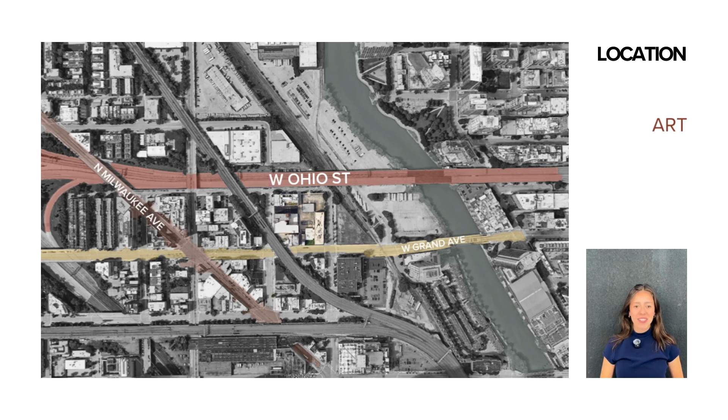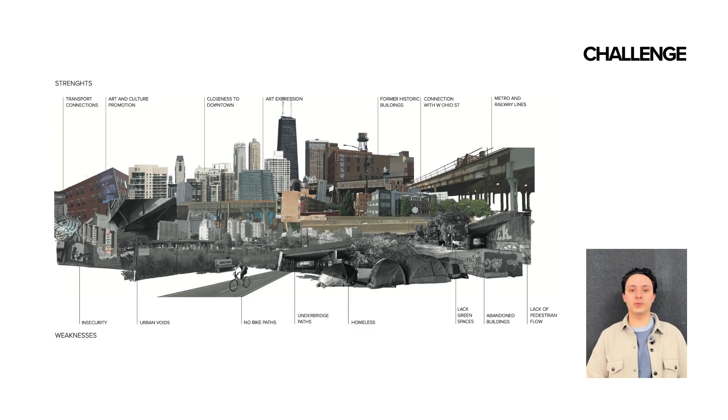Our project is conceived as a hybrid ecosystem where art, culture, and well-being come together in the Fulton district, responding to disconnection and lack of social infrastructure with a new model of urban living that heals, inspires, and reconnects people with nature and community. A challenge at the site was the lack of vibrant public life and the perception of insecurity, primarily due to the scarcity of accessible public green spaces and the presence of urban voids and abandoned buildings.

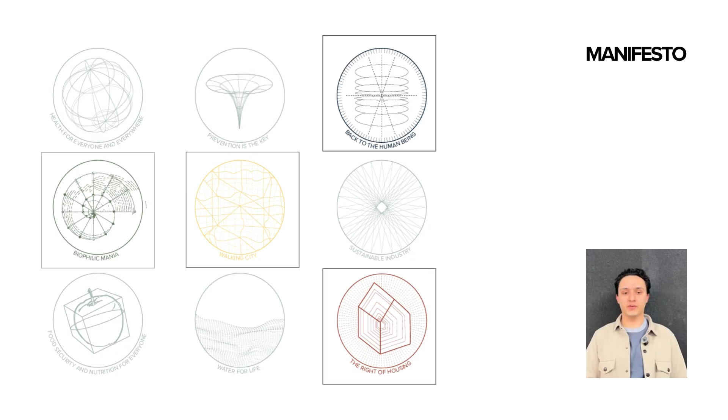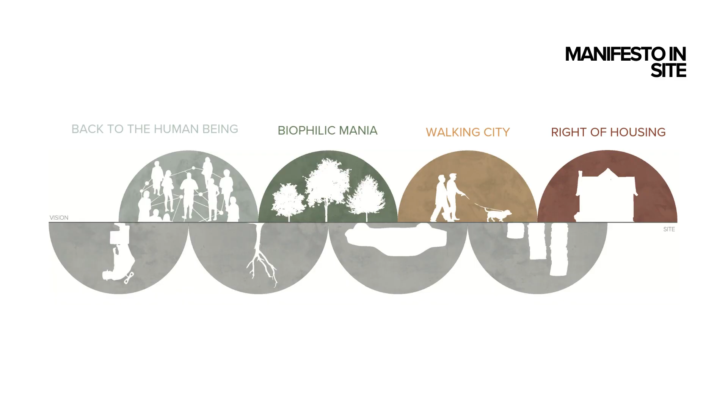Our design strategy directly addresses this through 4 core pillars of our collective manifesto: back to the human being, biophilic mania, walking city, the right of housing. These holistic frameworks fundamentally question how architecture can become the most powerful tool for well-being. The intervention begins with a commitment to preservation and adaptive reuse.

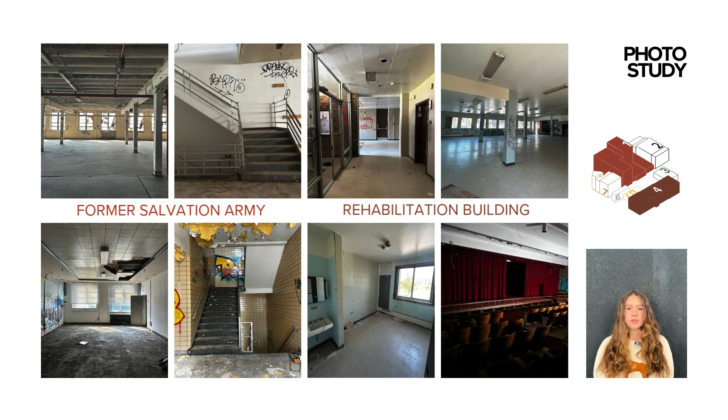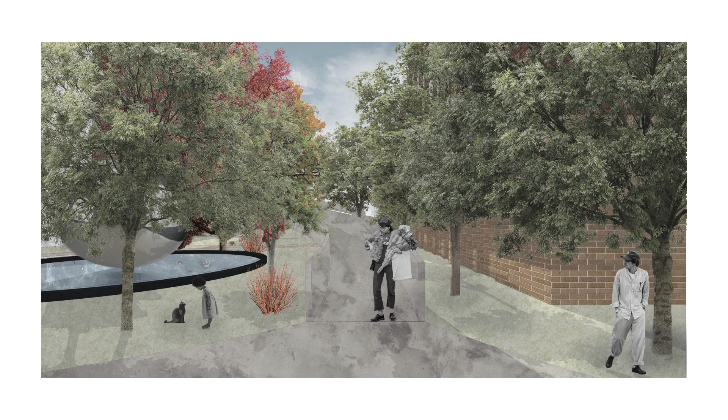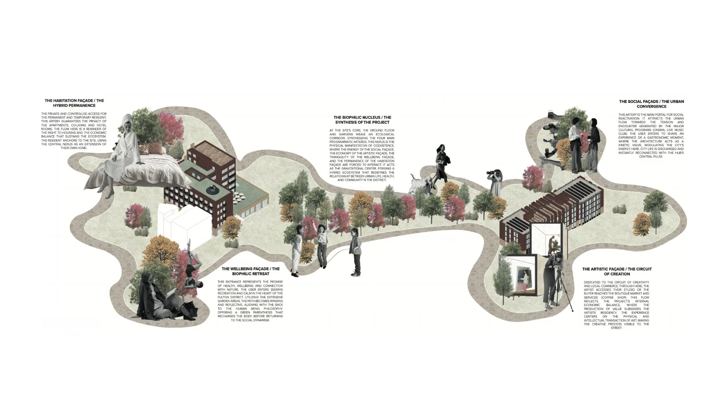This green nucleus immediately responds to human and environmental needs, providing accessible public space and biophilic elements. This strategy successfully establishes a powerful hybrid ecosystem where housing, hospitality, and public space coexist, transforming the site into a definitive hub of art, culture, and community.

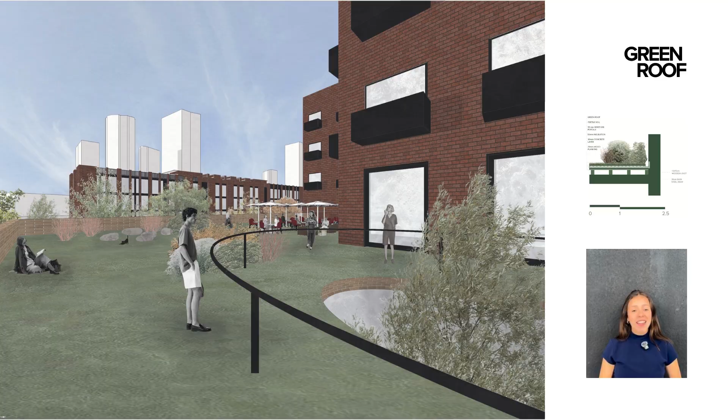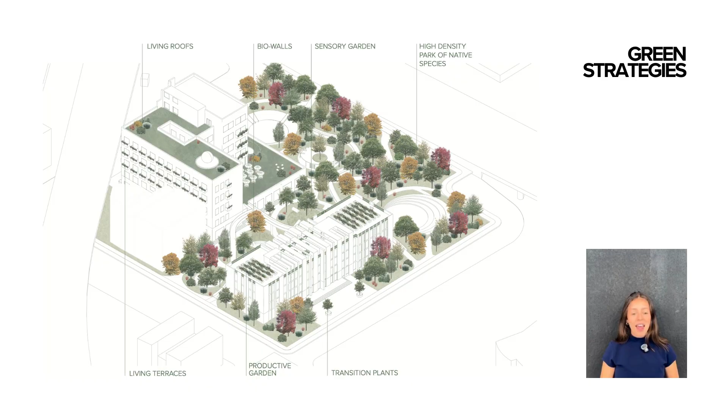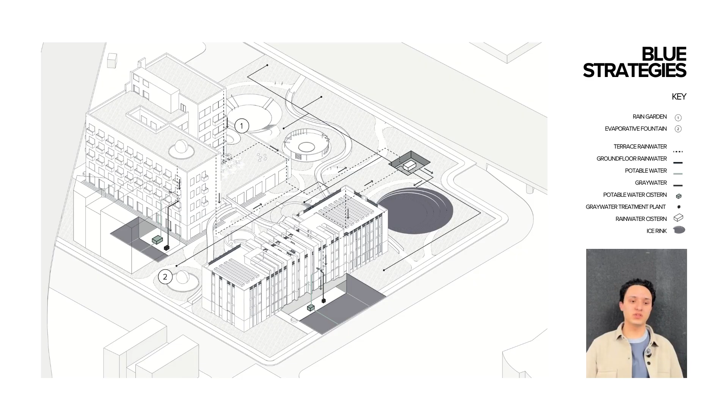Our blue strategies established a resilient and closed-loop water management system. We employ a sunken rain garden in the restaurant zone and incorporate evaporative fountains to passively cool the environment during hot months. Crucially, we implement rainwater harvesting across the rooftops to collect and store water for the irrigation of all park areas and the supply of the seasonal ice skating rink. Finally, a dedicated system for grey water treatment ensures that all water from the building is recycled and reused, significantly minimizing our demand on municipal resources and reinforcing the hub's commitment to water sustainability.

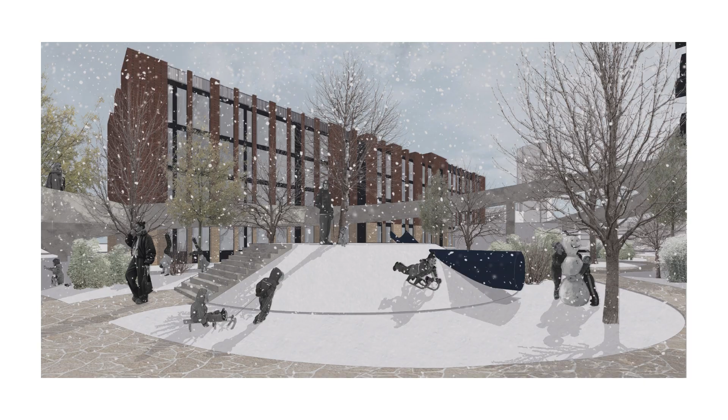The creation of this central green nucleus is a direct response to a critical urban need, addressing the increasing trend toward privatized spaces and amenity access conditioned by socioeconomic class. To counteract this, the design is anchored in seasonal adaptation, ensuring that the park remains vibrant, safe, and truly democratic year-round, resisting the obsolescence that plagues single-use areas during Chicago's extreme climate shifts.

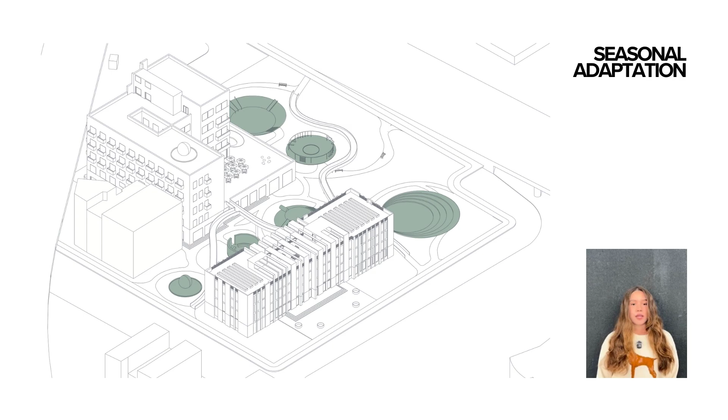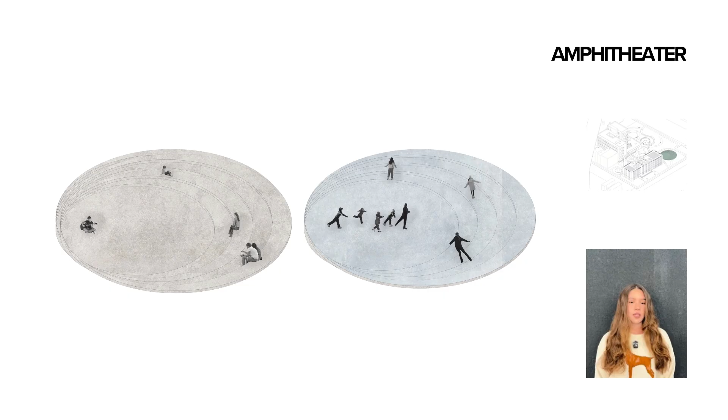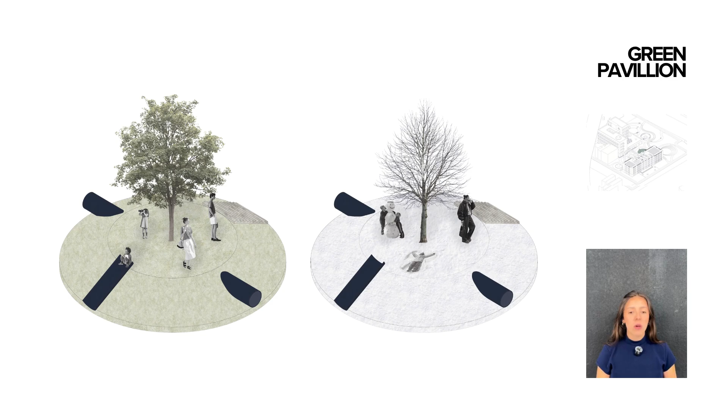We incorporated several interactive circular modules, each defined by a duality that maximizes utility. These spaces include the sculptural fountain, which welcomes visitors year-round and becomes an iconic winter sculpture; the amphitheater, which transforms from stepped seating and a forum into a seasonal ice skating rink in the colder months; the Green Pavilion, which adapts by incorporating a central fire pit to create a protected microclimate, ensuring it remains a vital gathering spot during extreme cold; the Sensory Garden, with a higher vantage point and a unique experience, whose slopes adapt for winter sledding; and the children's play areas with monkey bars and other play structures that also adapt for winter play.

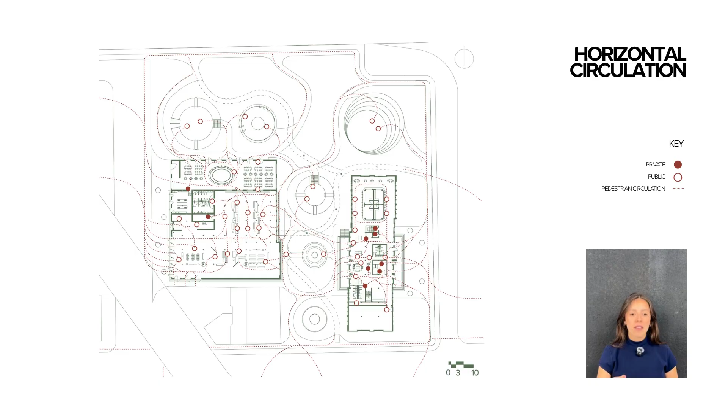In terms of circulation, the park incorporates ground-level pedestrian paths and a perimeter running and cycling track that reinforces our walking city commitment. Finally, a pedestrian ramp is integrated, creating an elevated walkway that reconnects the ground floor to the building's level 1, enhancing permeability and offering a higher perspective of the entire hub.

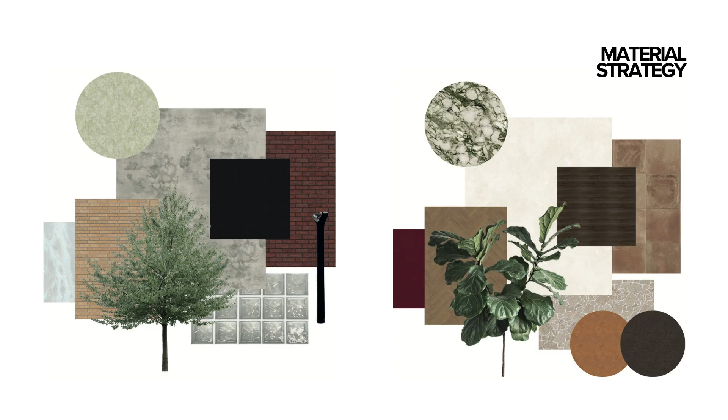The material strategy preserves the site's original industrial elements, which are complemented by new materials of the same character. However, to ensure visual cohesion, key alterations were necessary, most notably the significant facade redesign of the Atlr residential building.

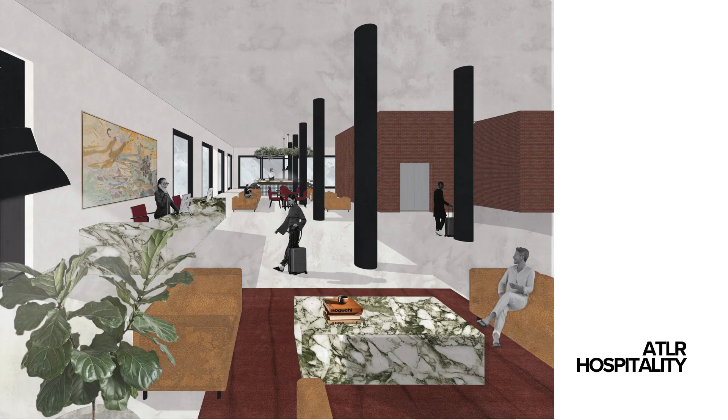The transformation of the former Salvation Army building into Atlr Hospitality is centered on preserving its status as a recognized community anchor to become the main destination of the project. The interior retains the main structural grid. New elevators were added and internal walls were strategically incorporated to maximize programmatic flexibility and introduce new hotel programs. The intervention of the iconic facade remains minimal, preserving its character while incorporating subtle green balconies.

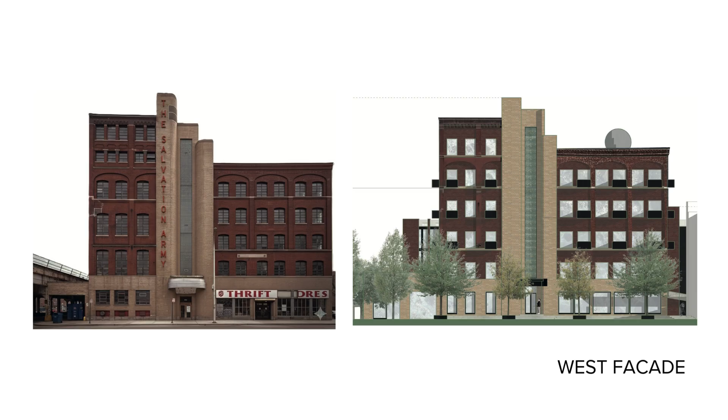Public amenities include a restaurant with a direct connection to the park, a cafe, a top-level bar, and a rooftop garden that offers the best views of the Chicago skyline. Finally, a gym, a spa, and a co-work zone exclusive to the hotel guests.

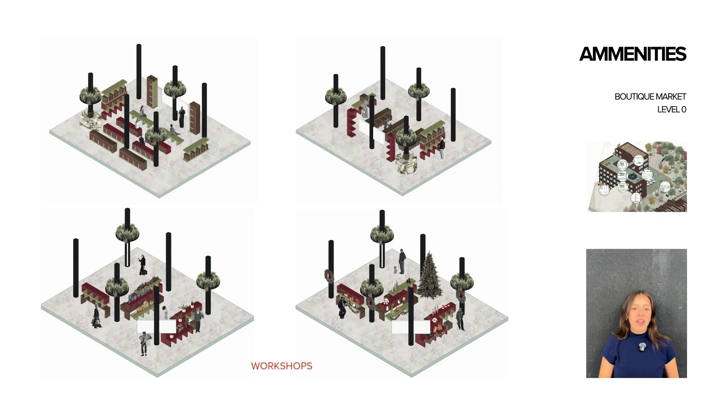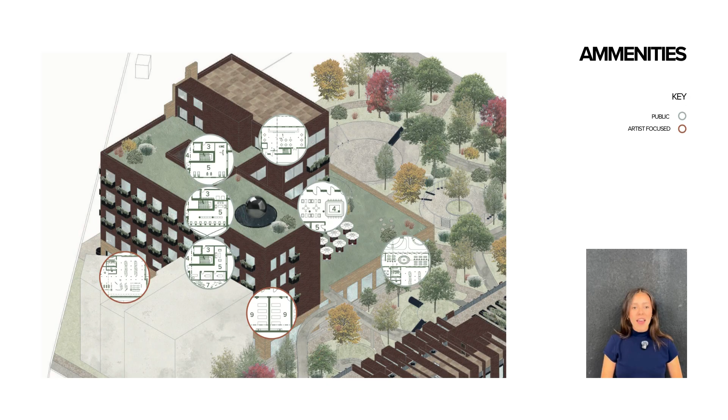The artist-focused amenities include a flexible boutique market created with multi-purpose furniture that offers the possibility to create workshops that host artistic activities. Conferences are divided by rotating whiteboards that serve as both adaptable partitions and vertical displays, as well as long-stay artists' private studios. This layered approach ensures that the building functions as a social nexus, balancing tourism and hospitality with community engagement and creative commerce.

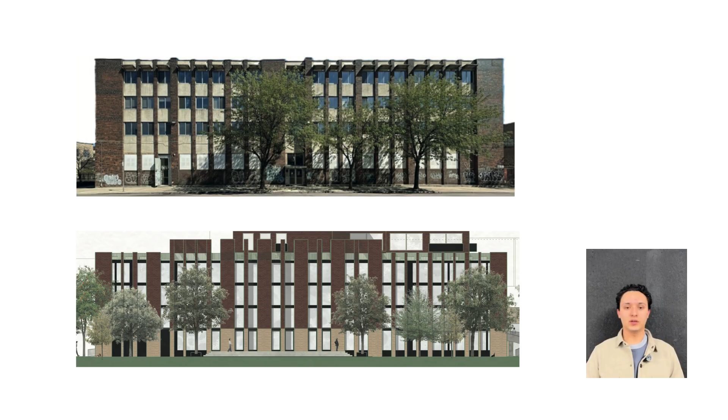The Atlr residential building's primary function is to provide housing for artists, offering apartments and a co-living floor, which is subsidized by the revenue generated from the wider project. The transformation involved a significant redesign that aimed to reinterpret its industrial character while enhancing verticality. We achieved this by incorporating larger windows within the existing brick frameworks and extending the vertical emphasis to the rooftop additions. The internal structure was retained, but major slab modifications created double-height spaces for key programs.

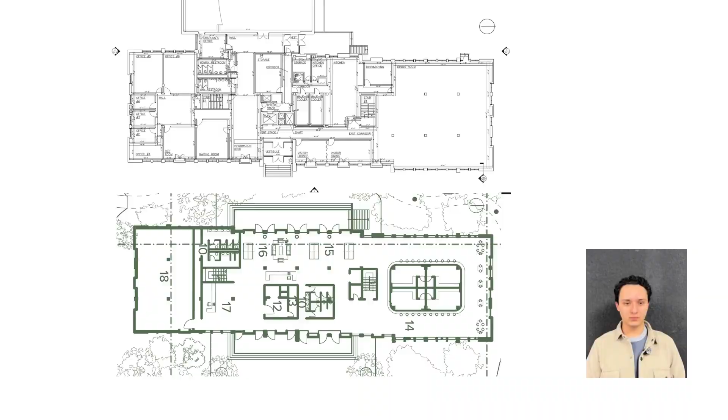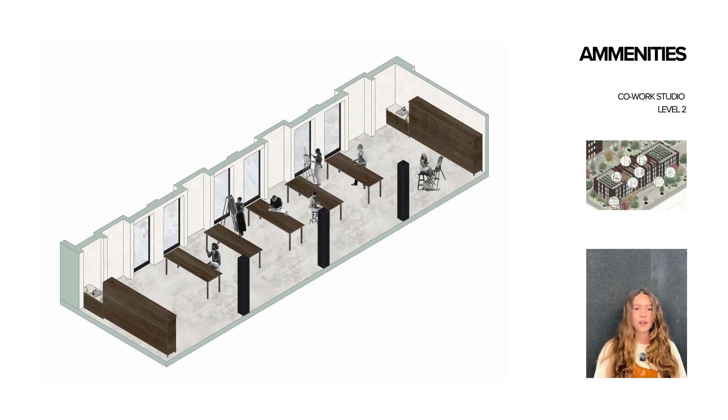The amenities are strategically categorized to serve both artists and the public. Public amenities located on the lower levels include an expansive gym, a snack bar which serves the amphitheater and the cinema, and the central recreation area and lobby, designed to foster community among residents and visiting creatives, reinforcing the building's function as a hub. The artist-focused amenities specifically include multiple co-working studios integrated across floors, and other publicly accessible amenities, including a dedicated arts public library and a cinema.

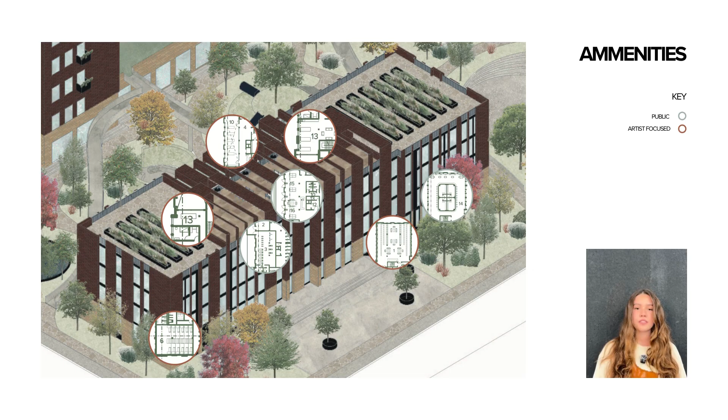This layered approach ensures that the building not only provides housing but actively sustains the hub's ecosystem of art, community, and engagement. Our work confirms that true urban health is achieved when we design to heal, to inspire, and to sustain the soul of its people. Because ultimately, if the city is a canvas, the resident must be the masterpiece.